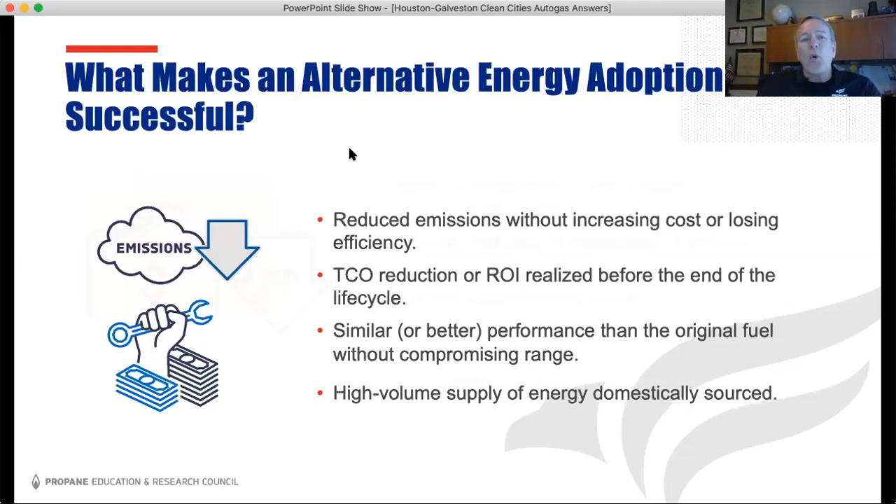And the last one goes without saying, we have to have a lot of this energy source available to take on that 60 billion gallons of diesel that's in the mid-duty truck market today. So we have to have a lot of energy to make that happen. So with those four criteria listed, how does propane, which we're talking about today, fit into that equation?

Well, we have the most cost-effective emission reductions of anything. We're going to talk about that a little bit today. We have the lowest total cost of ownership of any fuel, including gasoline and diesel. And we have the exact same horsepower and torque, maybe a little bit more in some cases. And we're able to put enough fuel, because propane is a very high energy source, and because it's a liquid, it stays in our fuel tank with a lot of energy for a very small footprint, and we'll demonstrate that a little bit here too.

And then the last one is my favorite. We have a lot of it. We have more propane in these United States than all the other countries combined. As a matter of fact, we used 9 billion gallons here domestically, but we exported nearly 20 billion gallons last year. And so my job is to change that equation and actually flip it on its head and use more of it here domestically than we export.

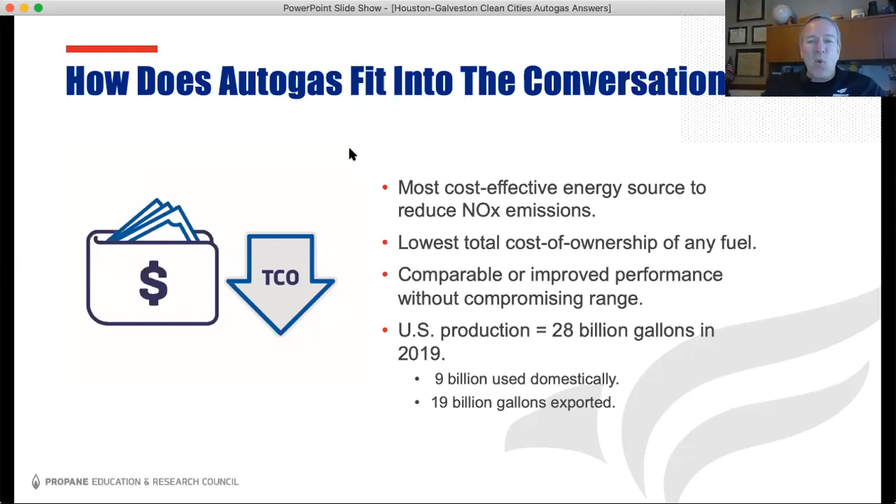And you're going to help me with that, because everybody on the call today is going to see the great value that propane provides, and do more fleet vehicle adoptions. And we're going to bring that equation upside down and keep more here and use more of it here than we actually send out. So what is this propane?

We use the term Autogas quite a bit, actually, in the title of the program today, Autogas Answers. But Autogas is the term that we use for propane when we're putting it in a vehicle and moving it down the road, whether it's a car or a truck or any kind of over-the-road vehicle. We use the term Autogas, and we actually borrowed that from the Europeans. They have millions and millions. As a matter of fact, propane Autogas is the third most used vehicle fuel on the planet, next to gasoline and diesel.

But it's exactly the same propane that you put out on your back deck in a grill that lets it heat and touch your food. It's that clean, but we use it in millions of households, for heating and on agricultural farms, in forklifts.

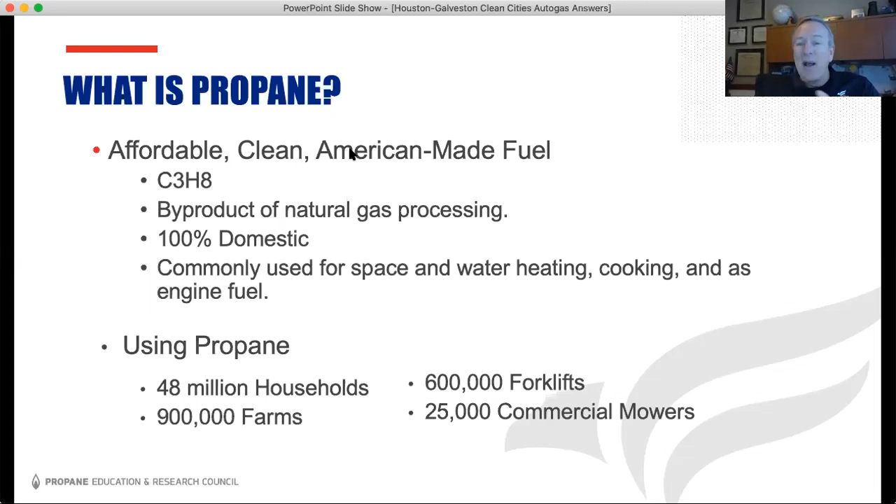As a matter of fact, in forklifts, long before the EPA was regulating any emissions, decades and decades ago, they learned quite early on that when you operate a forklift inside a warehouse with gasoline or diesel, it's not very healthy for people. As a matter of fact, too much carbon monoxide and you die. But when you operated on propane, it was very healthy. And so now the whole world is our warehouse, and so we're cleaning up all of it.

So where does propane come from? We have two sources, and we're going to talk about both of them today: the organic source, as it comes from the ground, as well as renewable sources, more of the man-made kind. And we'll talk about the benefits of that renewable portion as well. But the important part at this point is to note that they're exactly the same in molecular structure, and they're both non-toxic. Both of them, you can't spill it, you can't contaminate the air or soil or any water sources.

And so it makes for a very, very low risk to have that kind of fuel, unlike gasoline and diesel tanks that eventually have some kind of leakage and seepage, and the cleanup on the older tanks is very, very expensive. So these are the things we're going to cover today, as far as why fleets choose propane: lowest total cost of ownership, lower emissions, reduced noise, less maintenance, all of these things. And one of my favorites is actually the employee morale, driver retention.

Sometimes people kind of look at it with a jaundiced eye on anything new, but when I say I'm going to drive a school bus on propane, or I'm going to drive my delivery truck on propane, they kind of turn their head up a little bit. But once they actually start driving it, there's no turning back. When they're fueling, they don't get that diesel smell all over their clothes, and they actually can hear what's going on the bus because it's so much quieter than a diesel. So drivers actually prefer them very, very much over the others. So along with any energy source, we have to have a path to zero emissions.

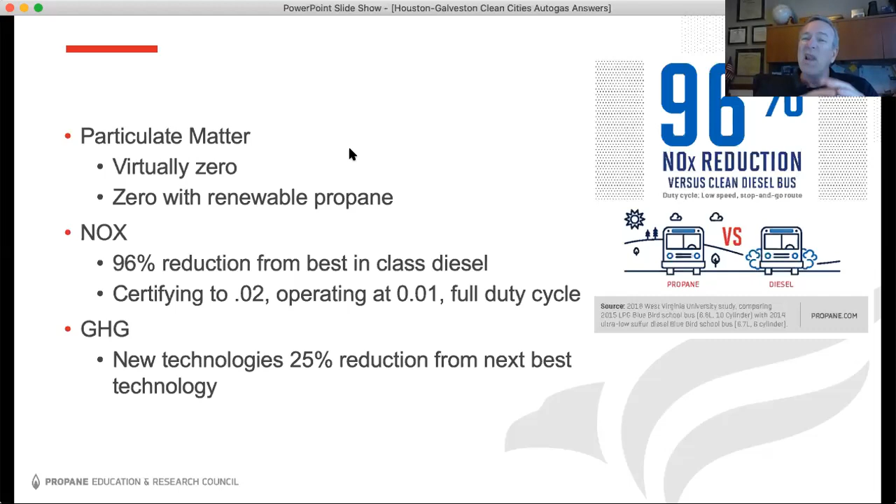Now the third thing we're working on is the greenhouse gas emissions, not just from the tailpipe but for the whole life cycle of the vehicle. We'll talk about that at the very end of what we're covering. I'm going to talk a little about fuel, since that's Brian's portion of this session, but more about the maintenance cost reductions when operating fleets on propane.

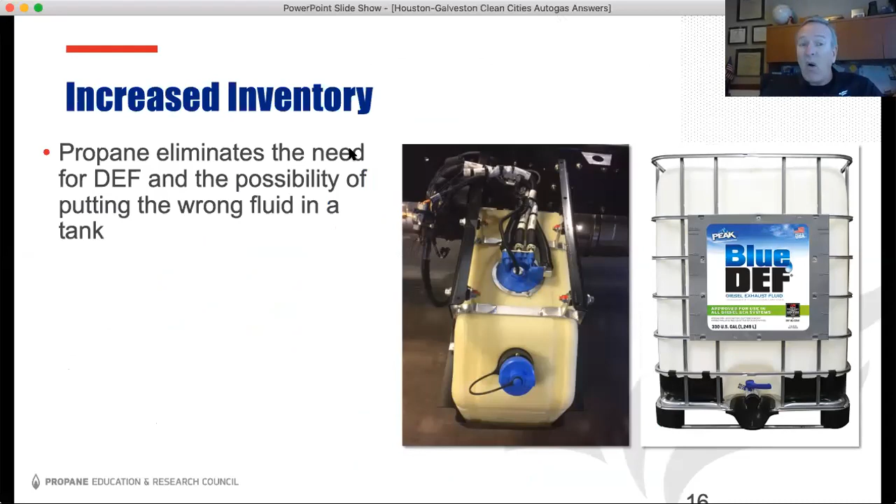None of the diesel exhaust fluid systems have to be on these vehicles, so we're saving money there. These are all the components added to a diesel engine to meet EPA and CARB emission standards. There's another big round of lowering in 2024 for those vehicles, and another in 2027, so this equipment is going to grow and get much more expensive. But none of this exists on a propane powered vehicle, so we don't have to pay extra for that.

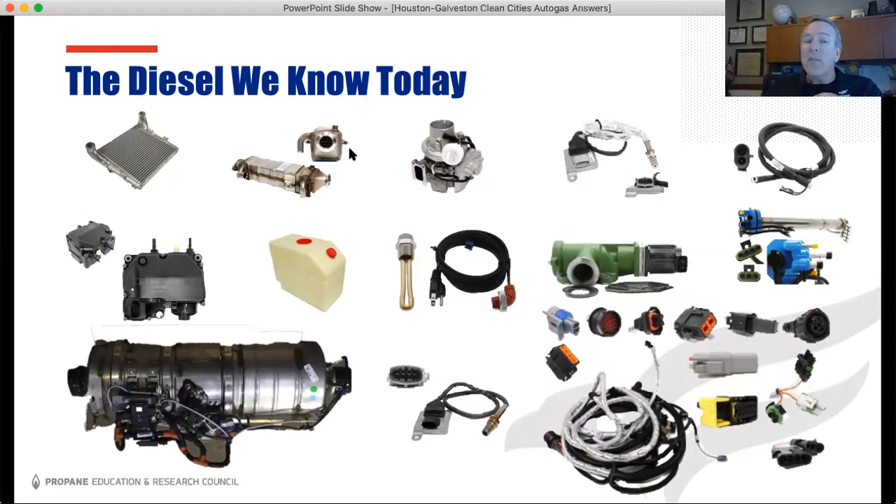We're already meeting the 2027 regulatory emissions today with the vehicles we're putting out on the market. Just to give you an idea, those engine components for that diesel engine are about $20,000 more.

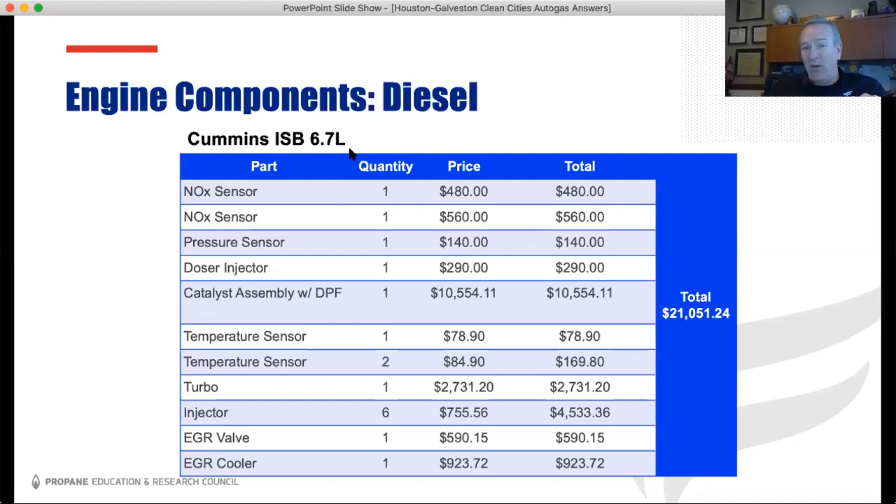When it comes to preventative maintenance, most of our propane engines are more like gasoline type engines. In a Ford V10, that 6.8 liter commonly used in school buses, it's only 7 quarts of oil and a $4.50 filter, compared to nearly 20 or more quarts of oil and about a $45 filter. So every single time you do preventative maintenance with an oil change, you're saving a couple hundred dollars per vehicle.

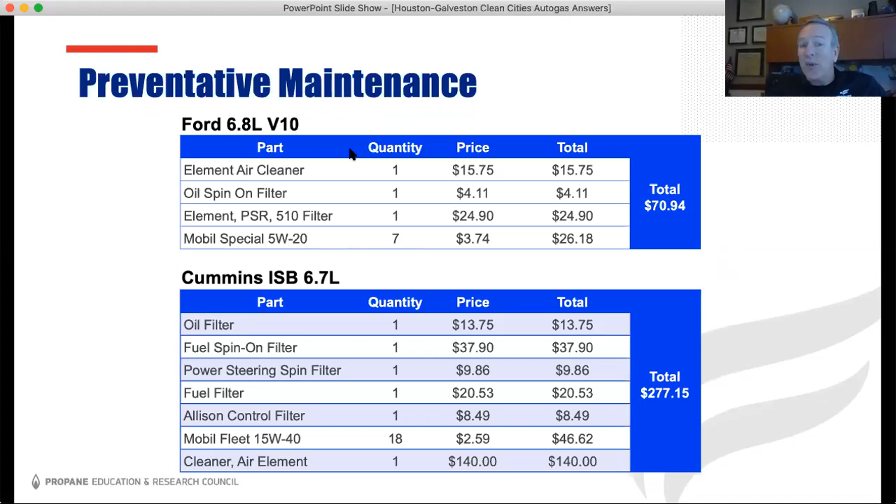So what can we run on propane? What vehicles can we have running on propane? Well, there's a lot of them: law enforcement, first responders, delivery vehicles, service trucks. One of the most popular, though, are actually the school buses. For me, 15 years ago, this was a really unlikely source. I did not pick this one as a winner, so I was surprised.

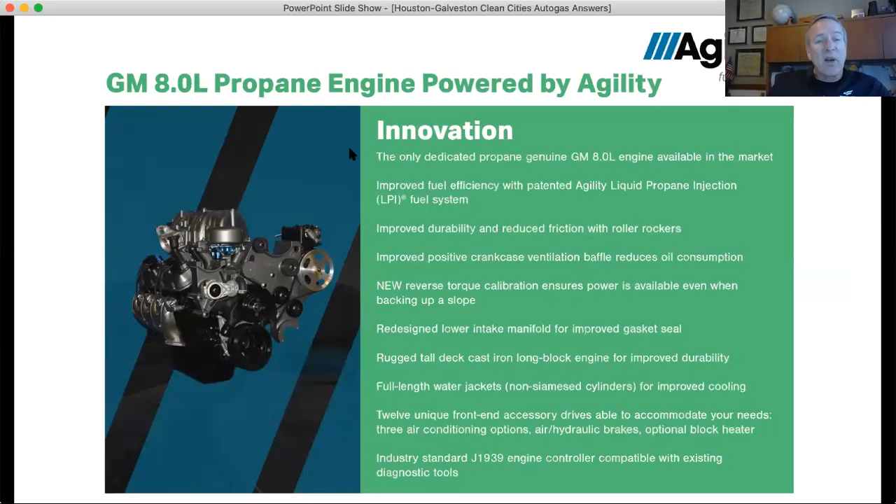Greenkraft out in California is one of the three ultra-low NOx CARB certified engines. Agility in Salisbury, North Carolina has the 8.0 liter certification. PSI does the 8.8 liter that we saw in that other Freightliner Custom Chassis, and they just announced their 0.02 ultra-low NOx CARB certification, EPA and CARB certification. That just came out a few weeks ago.

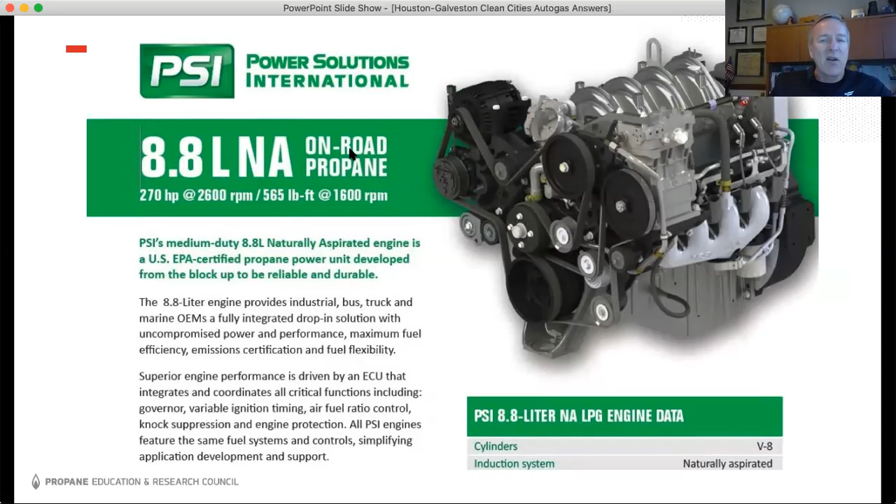Alliance Autogas is an aftermarket solution provider. If you have gasoline powered vehicles in these platforms listed here, you can actually convert them over to running on propane. Along with ICOM, an aftermarket provider that does the same thing for these chassis and vehicle model years. The thing you want to be sure of is that there's an EPA or CARB certification for the make, model and year you're actually wanting to convert over.

Campbell Parnell is focused strictly on the Isuzu platform, and one of their biggest customers is LKQ, the largest seller of repurposed automobile parts. There are thousands of vehicles now being converted over to propane.

The Autogas infrastructure, Brian's going to take care of this. I just wanted to show you that you can have a dispenser that just kind of clicks off gallons. They're all moving at about 10 to 13 gallons a minute, or you can have fuel management systems on these dispensers, all the way up to a full retail outlet that you have at the bottom of the exit ramp for Interstate 94 in Minnesota.

That's the alt fuel corridor, the M to M, the Michigan to Minnesota one, and this was one that Motor Week actually had an episode on just a few weeks ago at this particular place.

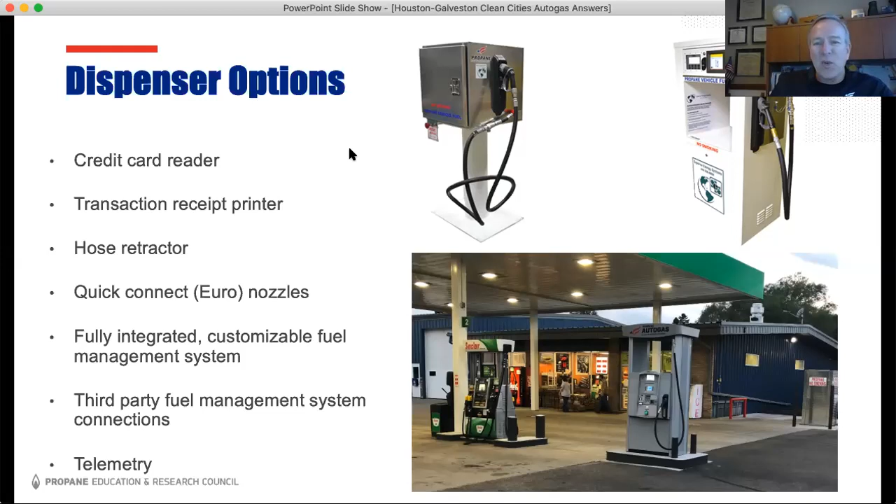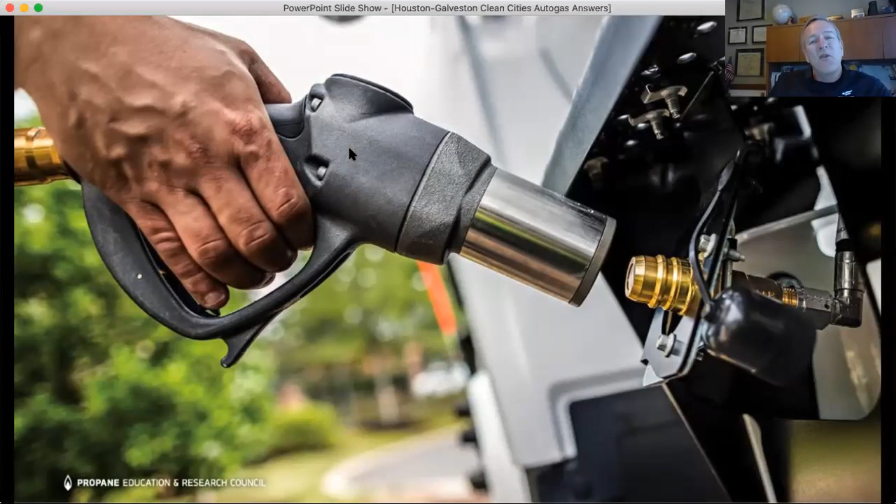That infrastructure had one change this past year. As of January 1st, 2020, the new regulations have the quick connect nozzle. It's a nozzle that you click on, squeeze it, and click it off, with no topping off — it automatically stops, making it really easy and convenient to refuel without wearing gloves or eye protection.

Just to give you an idea of the infrastructure cost, if you wanted to set up 10 shuttle buses or 10 trucks where you already have diesel fueling on your own premise, there wouldn't be any additional cost.

To go to propane, the equipment would be about $40,000 if you wanted all the bells and whistles on the fuel management systems there. CNG for overnight time fill is going to be a couple hundred thousand dollars, and even a little bit more for electric. But the CNG and electric are going to be more fixed. The propane is very scalable.

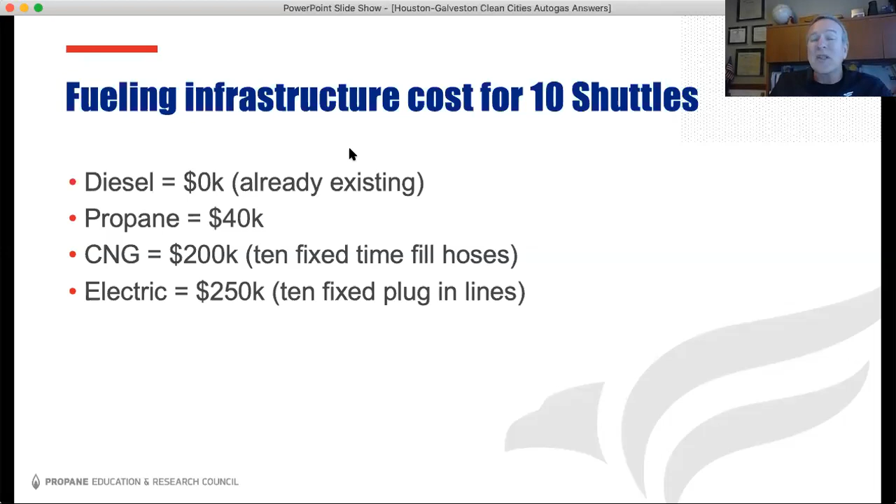You can have that same dispenser fueling up vehicles and just put a larger tank behind it, and you can do a larger fleet of vehicles. Brian will get into that and cover it a little bit more.

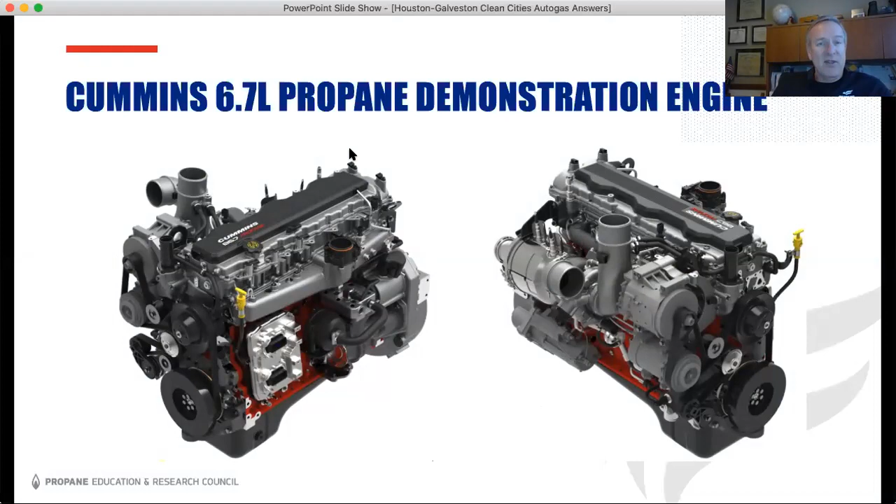So what's on the horizon? We just finished a project demonstrating propane's technology advancements when you have Cummins build a dedicated propane engine. PERC funded this particular project with Cummins over the last few years, and we've just been able to come out and announce this demonstration engine and what it can do. It has a very high compression ratio, 12 to 1, on this 6.7 liter block that's really popular for Cummins, but everything else on it is purpose built to maximize the benefits of propane.

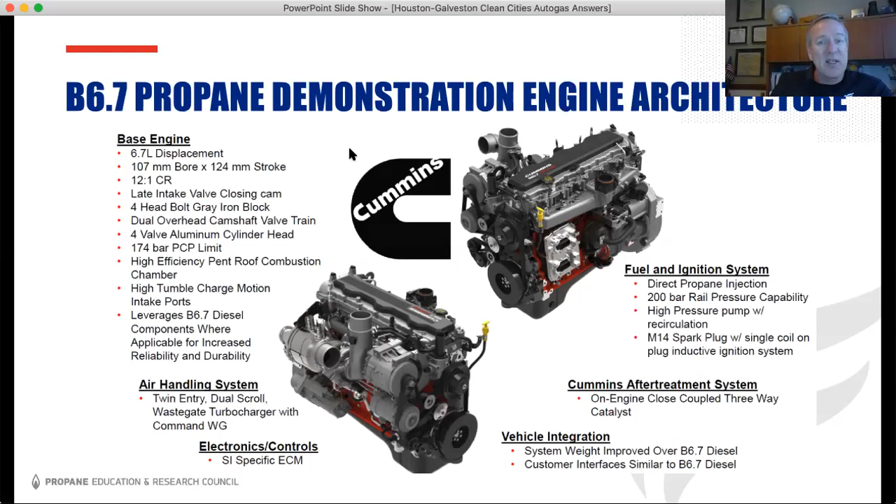And what we're able to do with this has been astounding. For the first time, propane has actually done better than diesel. You can see all the different engines down here and their torque and horsepower curves, but here's diesel, this black line here. This is on the first responder vehicles and fire trucks and so forth, so it's the best that diesel can do with horsepower and torque.

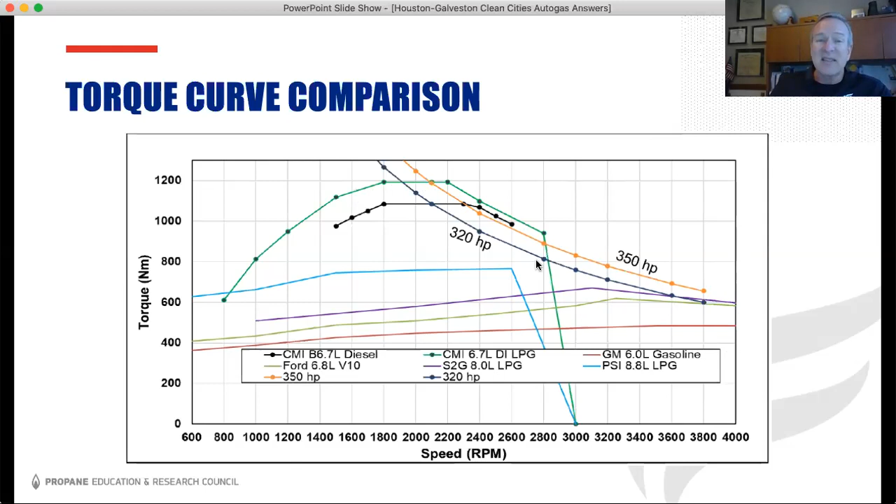Well, when we purpose built this propane engine, where you see the green line here is where propane is, and it beat diesel all the way around. We have 375 horsepower at 880 foot-pounds of torque out of this propane-powered engine. It has been astounding. And because of the efficiencies of this engine and how well it performs, we've also been able to have substantial greenhouse gas emission reductions from the tailpipe as well.

So this leads us into what's changing on the fuel side. We have a lot of propane, just like we said before, but moving into renewable propane gets us a little bit closer to reaching those carbon reduction goals. You remember about 10 years ago, there were just a few states that were introducing legislation on carbon reduction goals. And now, fast forward 10 years, we have a lot more states that have legislated carbon reduction goals.

So let's take a look at what renewable propane brings to the table. It's a very low carbon intensity, and we'll show that here. It comes from really inexpensive feedstocks, and we have a lot of it. But I think the most important part of any of these is the low energy conversion. If you have to use a whole lot of energy in the process of making your renewable fuel, it doesn't make sense. And as I'll talk about here in just a second, the amount of energy used to make renewable propane is actually a byproduct of renewable diesel, so it's kind of a freebie.

So let's look at the greenhouse gas life cycle analysis here of propane as well as renewable propane. And basically the standard today is electricity. We have a baseline now that says electricity is the cleanest fuel out there for use, so we're going to use that as a baseline of comparison.

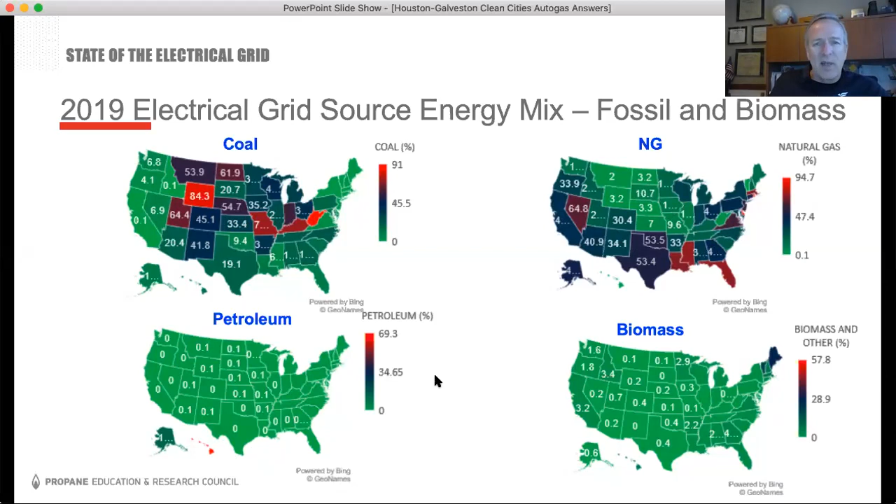So let's take a look at the electric grid here real quick. We have fossil fuels contributing to the electric grid per state in this particular graph. You can look at Wyoming up here, still has a lot of coal - 84% of their grid is actually run on coal. And you can see some of the other states that are like that. We have natural gas in a lot of states contributing to their electric grid, a little bit of petroleum out here in Hawaii, but biomass hasn't made a whole lot into that electric grid so far.

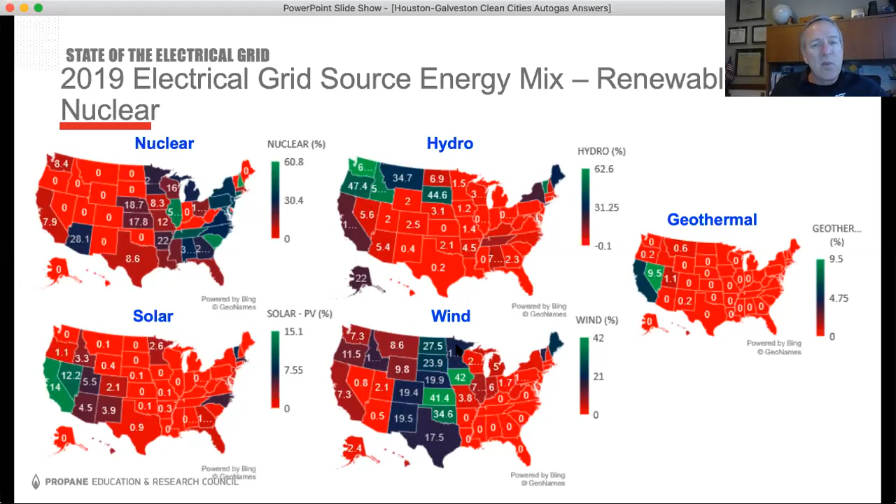So let's look at some renewable sources that are going into the grid. The electric ones here - in my home state of South Carolina, we have about 50% of our electric grid that's on nuclear, which has a very low carbon intensity. Hydro up in the Pacific Northwest is really effective. We have a little bit of geothermal, a tiny bit of solar, and a little bit of wind through the Midwestern states here that are contributing to that grid.

So let's take a look at the carbon intensity of propane compared to the electric grid of all 50 states. As you can see on the left hand of the slide, we have a carbon intensity for propane anywhere from 79 to 83. Now, if you look at these states, you can see that even in Texas, there's a carbon intensity for the electric grid there at 178.

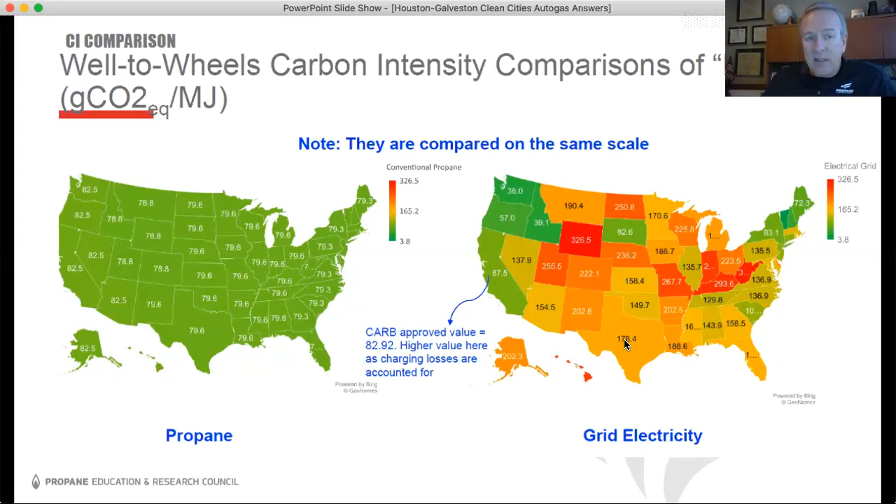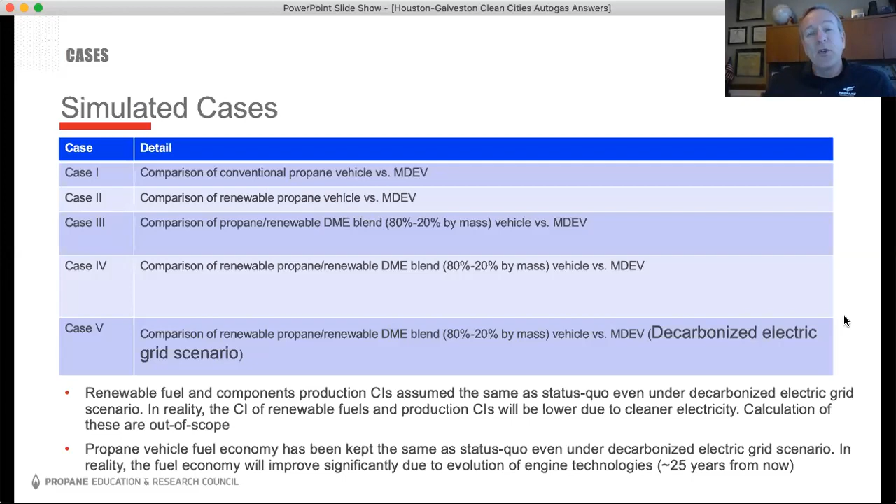So already propane is cleaner with greenhouse gases of a carbon intensity than the electric grid is here. So let's actually take a case study of an electric truck, much like those postal service trucks that are operating 200 miles a day.

We'll do the same on propane and the same one being charged off the electric grid. If we're just using regular propane compared to the electric grid, this is actually the number of tons of CO2 either reduced by the electric grid or reduced by propane. In 38 states, propane in its current state right now is this much cleaner on life cycle analysis of greenhouse gas tons per vehicle. So a 1-to-1 ratio of vehicle to vehicle.

And we can look in Texas, and if you take that medium-duty electric vehicle compared to the propane that's going in that same vehicle over a 1-year time period, there's 169 tons of CO2 less with propane than there would be from that electric grid.

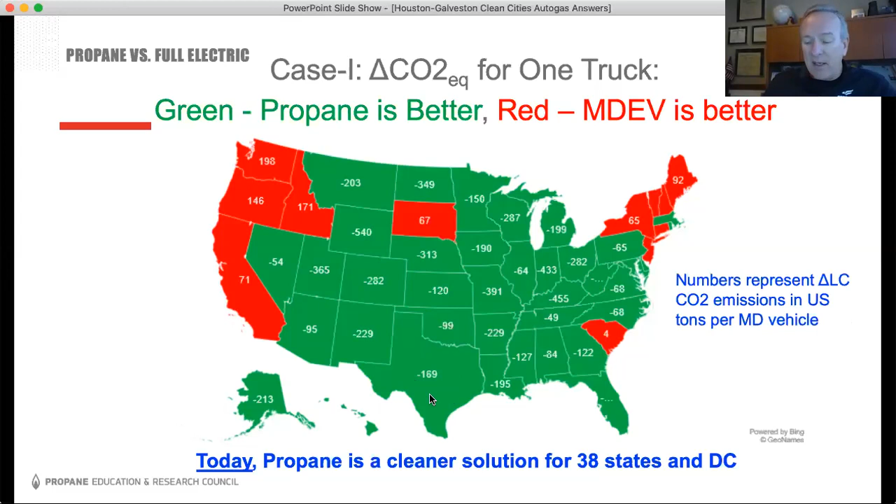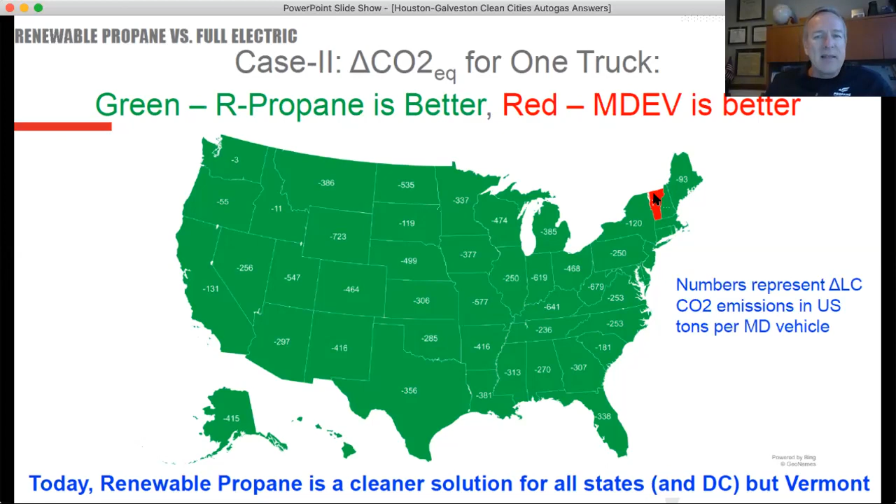So let's move into renewable propane. This renewable propane is now substantially cleaner than the electric grid, and almost every state, except for Vermont, which gets its electric grid from Canada's hydro source, is still a little bit cleaner than renewable propane. But when we start going into renewable propane made from DME, which has a carbon intensity of minus 278, we get even further. So we do a blend of renewable propane with renewable DME, and all of a sudden we are better than the electric grid in all 50 states, and by a substantial amount.

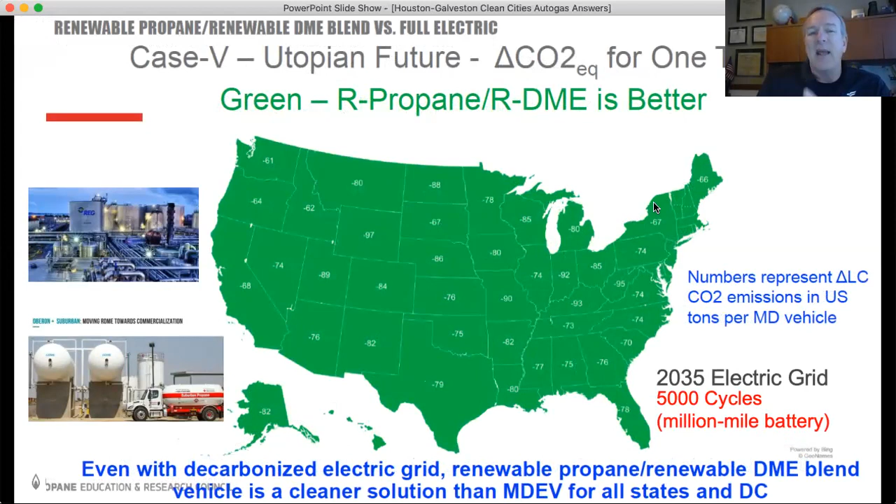Well, that's not fair, because the electric grid is getting cleaner. Okay, so let's give the electric grid its 2035 goals, and those goals are all met with renewable energy sources. We're going to give them a 5,000 cycle battery, so it has 1,000,000 miles on it. And we're going to compare our best case blend of renewable propane with the best case scenario of the electric grid. And even then, propane has lower CO2 emissions than that.

So to wrap all this up, the benefits of propane and renewable propane are very cost effective. You'd be hard pressed to find any propane vehicle conversion or upfit that's going to be more than 15% of the total cost of that vehicle. Whereas when you look at other sources, it's substantially more to run it on another source.

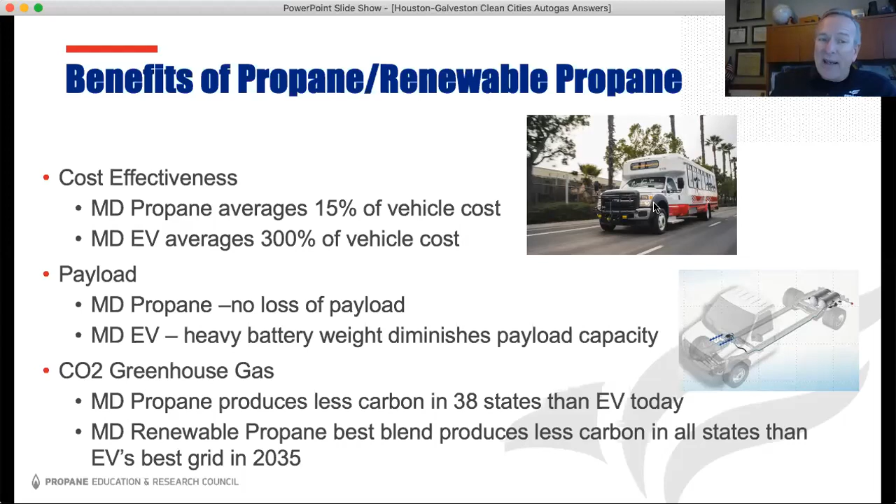We don't have to give up the payload. You can see a little schematic there of a cutaway of an E450, and the fuel tank is about the same size, and we don't have that extra heavy weight that's going to take away from the payload. And of course, we've just reviewed the greenhouse gases.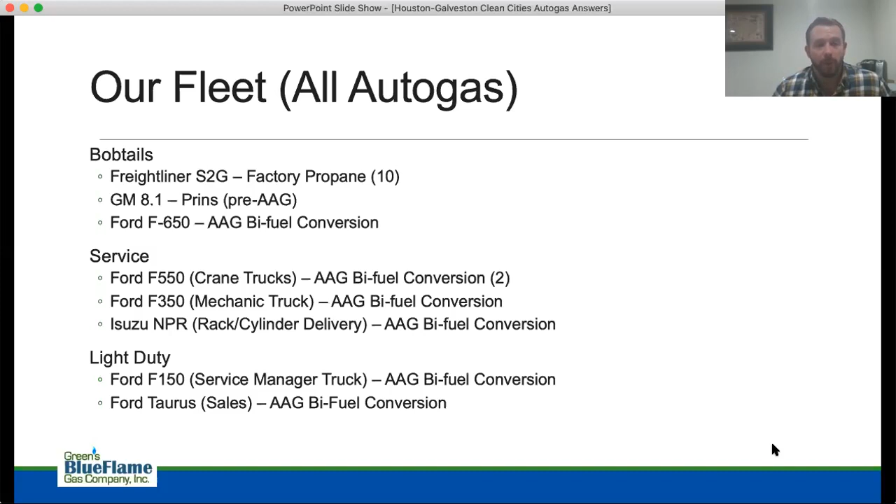In the early 2000s, we were kind of forced to take a step back and go into diesel, at least on the bobtail applications, because there was a gap in the technology for the fuel injection. The stuff coming out of the new vehicles, propane conversions hadn't caught up to that technology yet. Then back into the 2010s, we started transitioning back into propane, and along the lines we just really kept a running-on-propane mentality.

When you have that mentality, hey, we know we're getting the benefit, and we're going to jump these hurdles and make sure it works. We've also had a service manager for 40 years who's been working on these vehicles since this time, so that's helped us out a lot. We're committed to moving forward with that and having other service managers and mechanics take that on as well, not just for our customers' fleet, but for our own fleet.

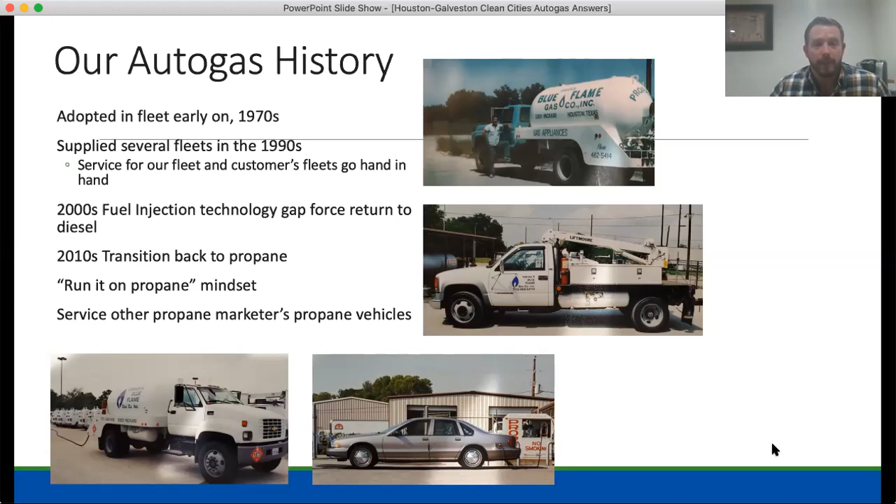Next slide. So, Steve talked a little bit about this, but in terms of starting up an Autogas program, there's really two things: the cost to convert, or the differential cost between propane and diesel or gasoline, and then there's the actual cost of the infrastructure. For a conversion upfit, you're generally looking at $6,000 to $8,000, depending on the vehicle and how many you get converted at one time.

As far as the infrastructure costs go, most of our customers actually don't buy the equipment. I think this is one thing a lot of people, when they're looking at fleet managers, when they're looking at getting into propane, don't realize: you can lease the equipment, which gives you a little bit more flexibility in terms of, if you lease your property and need to move.

If it's going to be a temporary solution, and maybe do a longer term solution down the road, this is a very viable option. Our customers would pay a margin on the gallons to pay for it while still getting the savings they need, not like a monthly or yearly lease.

What we are responsible for in these situations is the propane company would supply the tank and dispensing system, and the customer or end user would supply any permanent structure that goes into the property, like foundations, concrete pads, crash protection, electrical, and permitting costs depending on the city. So when you're looking at just those few things, the customer's cost up front can typically be around $5,000 to $30,000, usually depending on if they're located within the city limits or not.

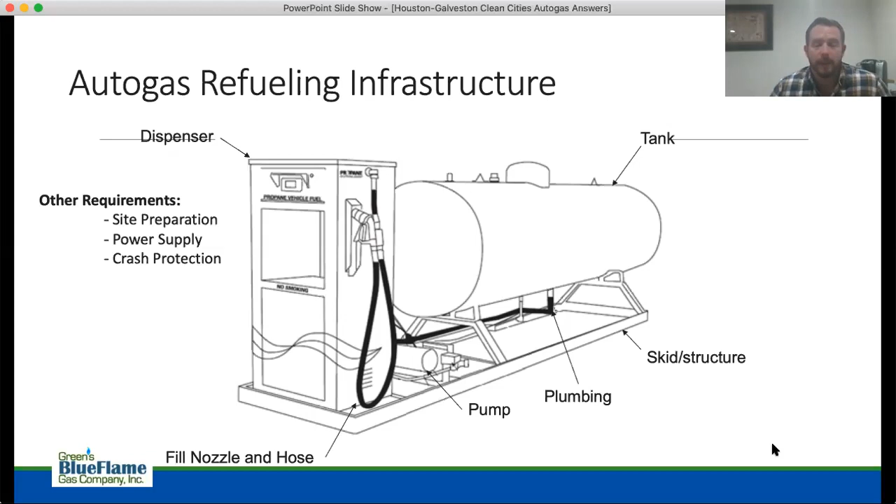Like I said before, from the customer standpoint, the biggest things are the site prep. If you're in the city limits, they do require a concrete pad. You've got to have the correct power supply and bollards around this to ensure that everything's safe.

On the dispensers, you've got the simple push to start, which has to be locked in a different way, and you've got card access, which can be opened. This can be for either a fleet or even a public location where you have a card. Somebody has to have training before they're able to use it. One of our dispensers in particular even shows a video to ensure people have been trained prior to letting them fuel.

So there's cellular-based communication. You can customize the data management for the information that you want, and this is all typical for what large fleets would have for gasoline and diesel. You can even accommodate multiple fleets at a single location using the card access.

As far as options, you can have a single or dual hose setup. It's installed as a package, so there's not anything else that has to be added to it. And you can add these dispensers and pipe them in as your fleet grows, should that happen.

One thing that's not in here specifically that I'll talk about is the nozzles, because that's really very important. Most people are familiar with the Acme nozzle, where if you go get a cylinder filled up somewhere, like a forklift cylinder, or if it's an older propane vehicle, it's a screw-on type connection. Historically it wasn't really the easiest to work with, and if there's any school districts listening, you probably know what I'm talking about.

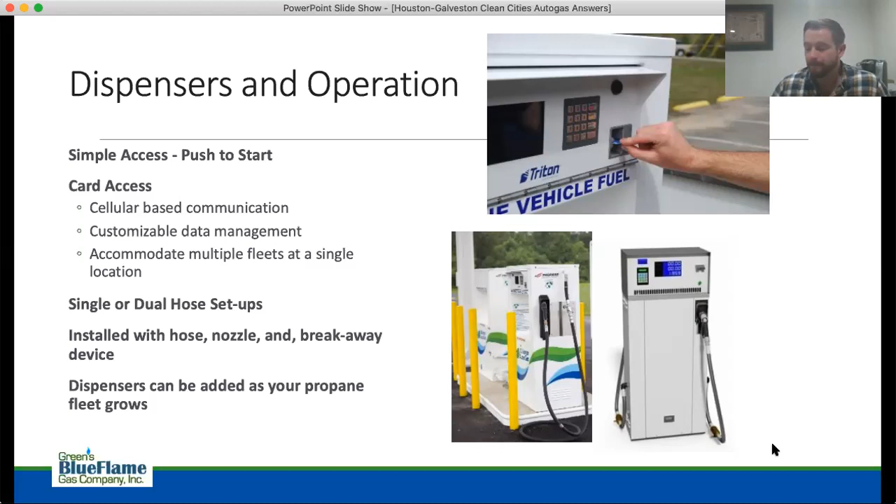Another one of the hurdles in terms of propane, and this goes for if you're a propane marketer, supplier, a school district, or a fleet of delivery vehicles, is how do you get these converted and how do you support the maintenance of these vehicles. The biggest thing here is the conversion systems are much easier to install and maintain than they used to be.

Even as recently as 5-6 years ago, we would get a conversion system and it would just be a bunch of wires that would have to be connected by hand, each one individually. Nowadays you get a harness where you unplug components and plug these in.

If you have mechanics available, if you have a fleet manager, this is something those people can be trained to do if you have a large fleet and want to do it yourself. The thing is, there's no one solution that's going to be the same for every fleet.

So you have a case like my last position where you have mechanics on staff who can perform the maintenance. Most equipment providers with the conversion systems will let you come to them, or sometimes they'll even come to you to perform the conversion training, the maintenance training, that type of thing.

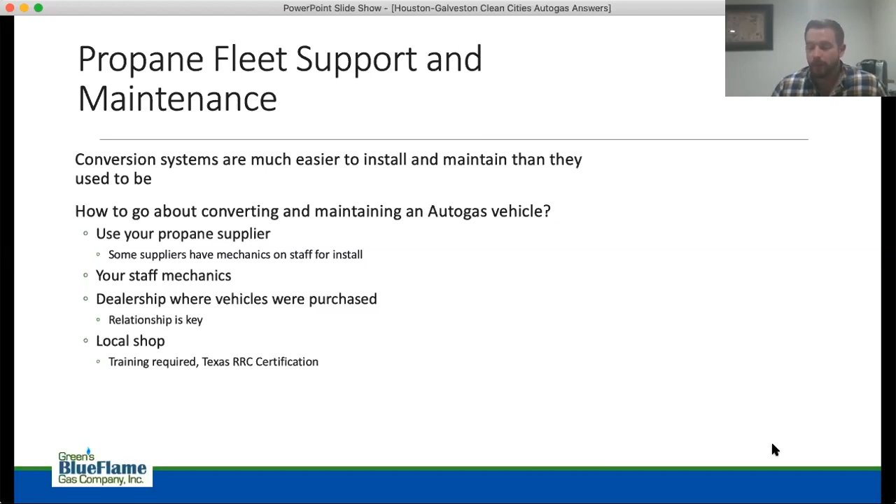So I'm just going to give here a couple of example fleets that we service.

This first one is a hospital network in the Texas Medical Center, and they are replacing diesel with propane. Their fleet consists of 20 propane-only buses, basically the same as a school bus, just maybe upfitted a little differently on the inside. They also have 9 paratransit shuttles that we converted using an ICOM system when they purchased them. They had them shipped into Houston and brought them to us, and we went through them to get them running on propane.

This particular example of an infrastructure for refueling is 2,000 gallons, 2 1,000-gallon tanks. They do have tank monitors on there that let us know when they're getting low. It's a private dispenser, and even with around 30 total vehicles, they're still using one dispenser. The way they operate allows that—they don't bring all the shuttles in one day at one time and have everybody run it. The drivers do it themselves.

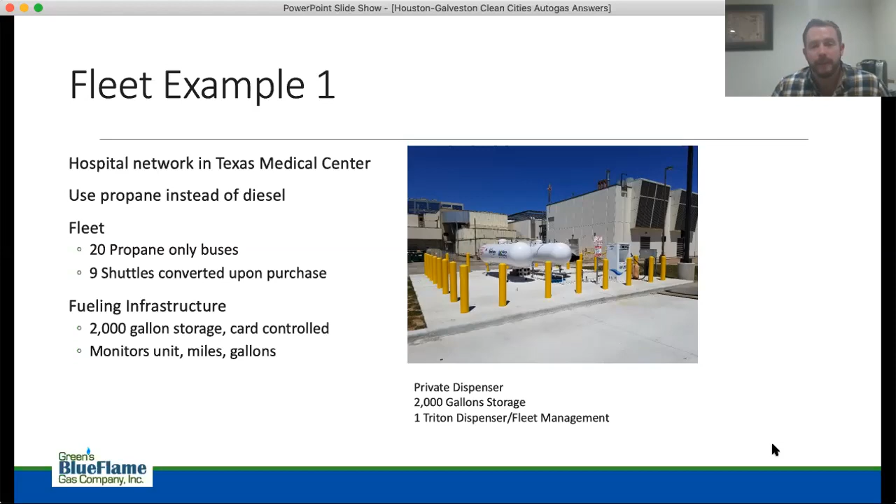This is a really good paratransit example. They use this for both employees and patients getting from the parking lot to the hospital, or within the hospitals inside that hospital network and medical center.

This second example, which Steve mentioned in his presentation as well, is an airport park and ride service. These are also really good applications for propane due to the vehicle size, the amount of miles they run per year, and the amount of gallons they consume. They get an ROI pretty quickly on the conversion cost.

When we first got in contact with them, they were using CNG and diesel, and they're required to run half their fleet on alternative fuel due to being located inside and operating inside of the airport network. So they were looking at different options other than CNG.

They started by converting 2 to 3 shuttles a year into propane, then followed it to see how it works. They've been really, really happy, and over time they're starting to slowly work in more propane into their fleet.

As far as their particular infrastructure, it's not on site. We've got a fueling station at Bush Airport, and it's what is generally referred to as a public-private fueling station—in other words, it's locked. You have to have card access, or in this case a key, to get into the dispenser. It monitors the same things: unit number, miles, gallons, and in this particular example they were actually able to get a cost savings over natural gas as well.

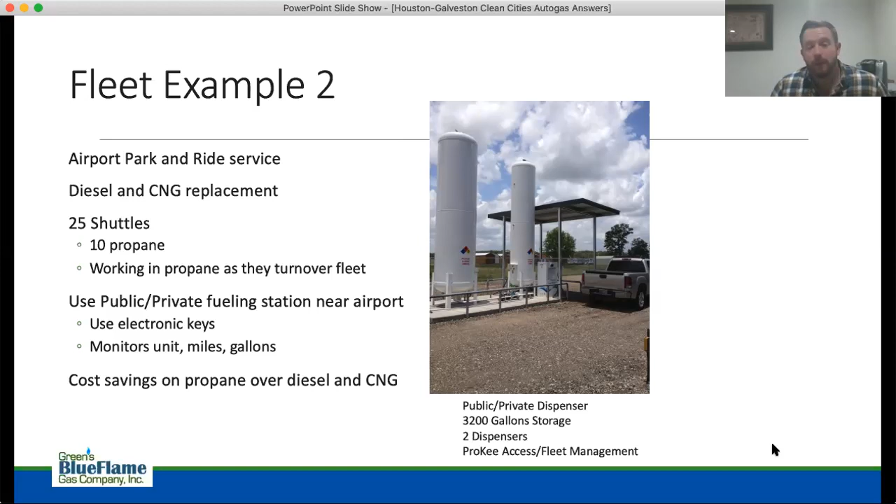One thing many companies don't realize, and I've seen this a lot with school districts, is that going into propane first is kind of hard—because they want that big 18 or 30,000 gallon tank, and they can't do it right away. One of these temporary solutions is something to consider, rather than having a propane truck come in and fill each bus individually. In terms of time savings and having access, this could work very well.

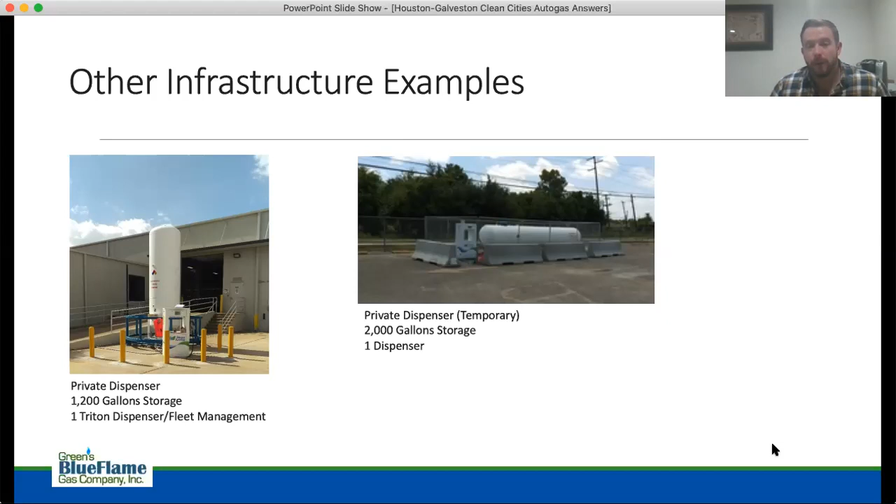So you see the fueling for propane and maintaining that constant supply is really fairly simple and straightforward, and it's kind of all based on who you build a relationship with and who you use in wherever your area is.